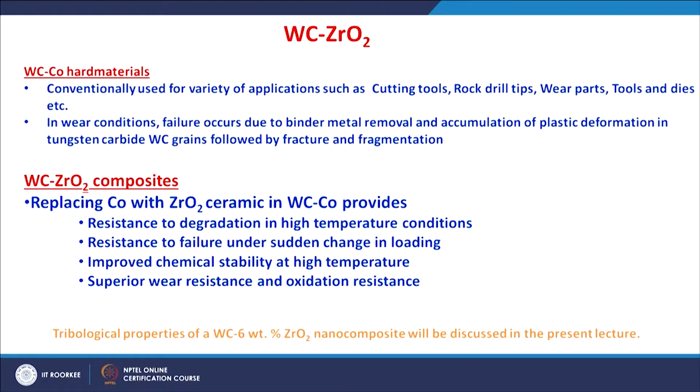First of all, the tungsten carbide of around 0.2 micrometer and the zirconia, which is a tetragonal zirconia stabilized by 3% yttria. So, 3 mole percent yttria stabilized zirconia powder of around 27 nanometers.

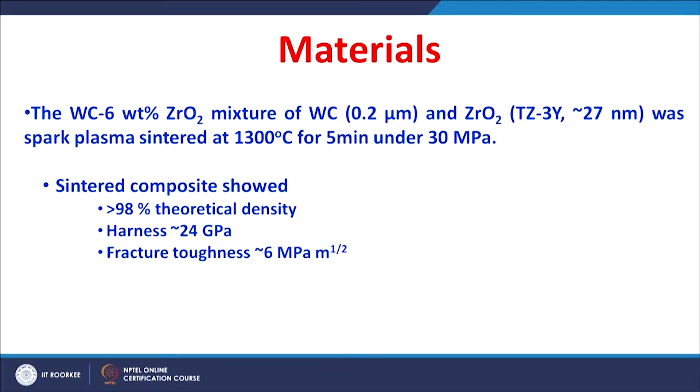These two powders, tungsten carbide and zirconia, were mixed into a tungsten carbide 6% zirconia powder mixture, and this mixture was spark plasma sintered at 1300 Celsius for 5 minutes under 30 MPa pressure with a high heating rate of around 600 Kelvin per minute.

All these ceramic composites showed a very high density of more than 98% of the theoretical density, and also showed a hardness of around 24 gigapascal and fracture toughness of around 6 MPa root meter.

The tungsten carbide cobalt material generally has a hardness of around 11 to 12 gigapascal, whereas such tungsten carbide zirconia has an extremely high hardness of around 24 gigapascal. Of course, the fracture toughness is moderate at 6 MPa root meter.

The sintered tungsten carbide zirconia ceramic composite was investigated for phase analysis and microstructural characterization. The phase analysis by X-ray diffraction technique indicates the predominant phases of tungsten carbide and tetragonal zirconia, with no other phase formed and no change from tetragonal to monoclinic zirconia during sintering.

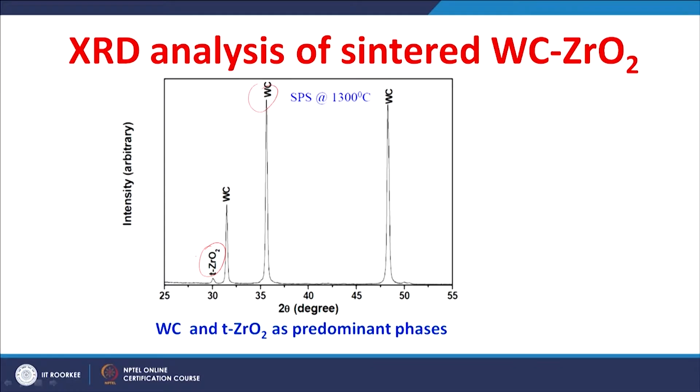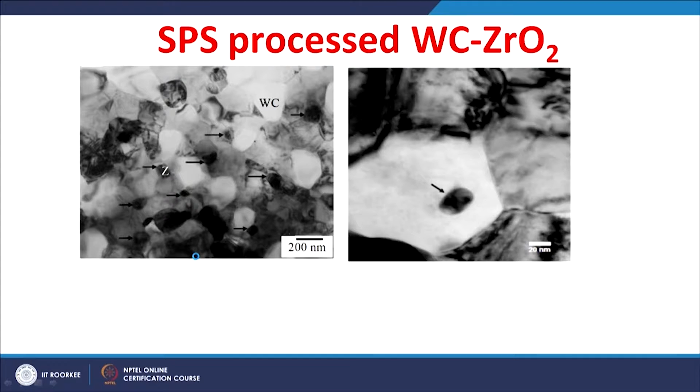This shows the efficiency of the sintering technique we used, that is spark plasma sintering. The spark plasma sintered tungsten carbide zirconia ceramics showed a microstructure of equiaxed tungsten carbide grains, with zirconia particles along the grain boundary as well as inside the grain of the tungsten carbide.

The equiaxed tungsten carbide grains have an average grain size of around 0.3 to 0.5 micrometer, whereas the zirconia particles are still within the nano region, having around 30 nanometers.

Considering the initial particle size of around 0.2 micrometer for the tungsten carbide and around 27 nanometers for the zirconia, this sintering technique is efficient to produce a dense tungsten carbide zirconia ceramic with nano-sized zirconia particles distributed within the grain structure of the tungsten carbide.

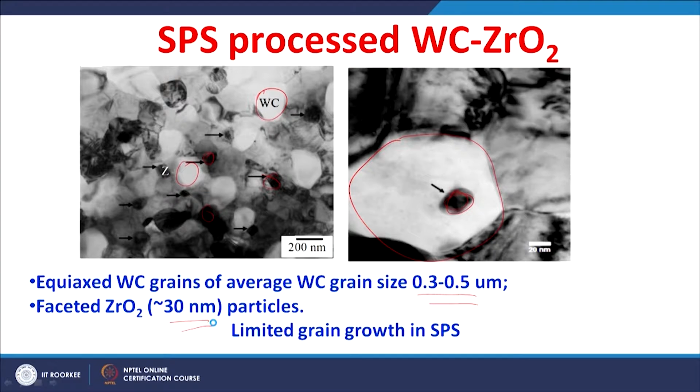There is limited grain growth occurring in spark plasma sintering, which gives a combination of superior properties. That is how we got a very high hardness of around 24 gigapascal and a moderate fracture toughness of around 6 MPa root meter.

These materials, the tungsten carbide 6% zirconia ceramics, were fretted against steel at different loading conditions with a fixed combination of fretting parameters.

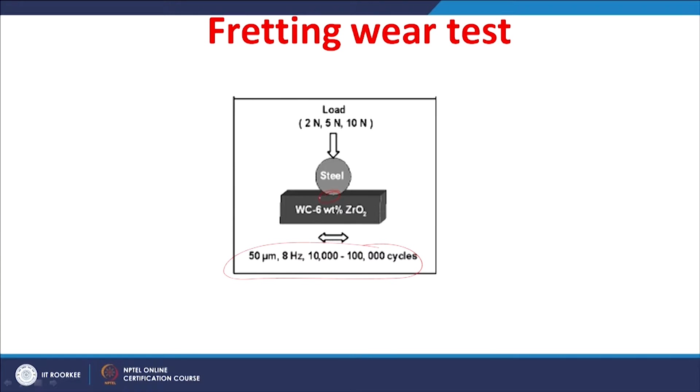This fretting was done in mode 1 fretting conditions, which gave gross slip conditions at the contact. The fretting test parameters were fixed at 50 micrometer oscillation displacement with a frequency of 8 hertz, and the fretting was conducted with varied numbers of cycles from 10,000, to 50,000, to 100,000 cycles.

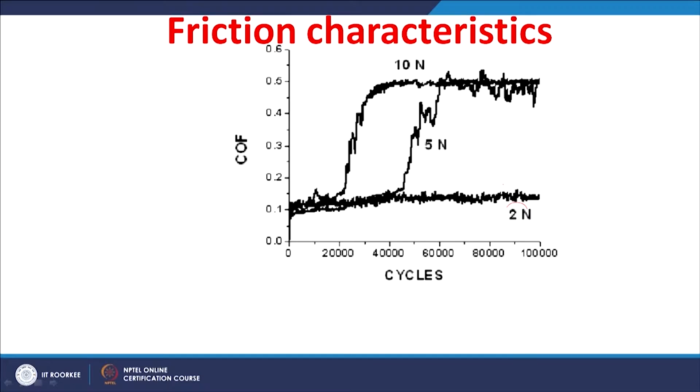Let us understand the frictional characteristics as a function of fretting duration as well as the load applied. This fretting shows that friction is strongly dependent on both the load and the number of cycles.

At a lower load, the friction drops to a very low coefficient of friction of around 0.1 within about 20,000 cycles, and then remains almost the same throughout the test up to 100,000 cycles.

There is no change in the coefficient of friction. Whereas, as the load is increased to 5 Newton, the friction coefficient is around 0.1 to 0.15 in the initial 20,000 cycles, and as it reaches 40,000 cycles it shoots up, and by around 60,000 cycles it goes to the maximum coefficient of friction of around 0.5.

So there is a transition with the fretting duration for the test done at 5 Newton load. And if you see the test done at 10 Newton load, the transition occurs even at an early stage. The coefficient of friction was less in the initial stages of around 20,000 cycles, and immediately after 20,000 it went up to

0.5 average coefficient of friction in the steady state, and this reaches around 40,000 cycles. So there is always a running-in state and a steady state, with no much difference between the running-in state coefficient of friction and steady state coefficient of friction at lower load, whereas there is a difference between the running-in state coefficient of friction and the steady state coefficient of friction at higher loads.

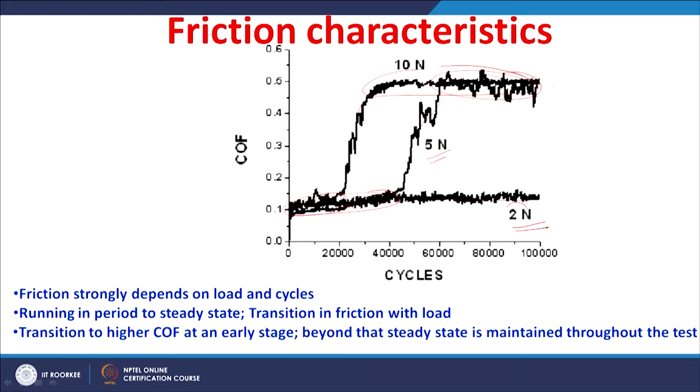In addition to that, we saw a transition occurring from low load to higher load in the friction. The transition to higher coefficient of friction occurs at an early stage for the test done at a higher load, and once it achieves the steady state, it actually remains in the steady state throughout the test.

The wear rate was also determined. You can see the wear rate varying from around 0.2 times 10 power minus 8 mm³ per Newton meter to around 1.2 mm³ per Newton meter. So there is a change in the wear rate with change in the load as well as the number of fretting cycles. First of all, the wear rate is of the order of 10 power minus 8 mm³ per Newton meter.

This is a very low wear rate compared to the wear rate obtained with the conventionally sintered tungsten carbide 6% zirconia ceramic, which shows 10 power minus 6 mm³ per Newton meter, whereas the spark plasma sintered tungsten carbide zirconia nanoceramic composite exhibited a wear rate of 10 power minus 8 mm³ per Newton meter.

Increase in wear rate is also observed with increase in the load as well as the cycle count. At a lower load, the wear rate was less for the test done for a small number of cycles, that is 10,000 cycles. For the test done at 10,000 cycles, even if you change the load, there is no much difference; it changes from around 0.2 to around 0.4 times 10 power minus 8 mm³ per Newton meter.

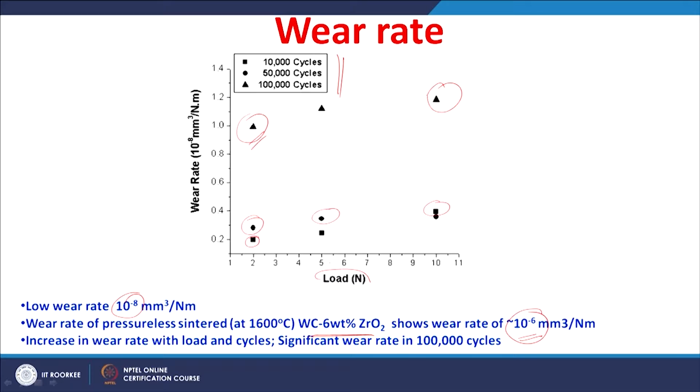Similar to that we observed for the friction, wear also changes with the load or the fretting duration.

The wear depth also indicates very important information. There is a negligible wear depth at lower loads of 2 Newton, but a significant increase in the wear depth as well as the wear rate at the higher loads of 10 Newton.

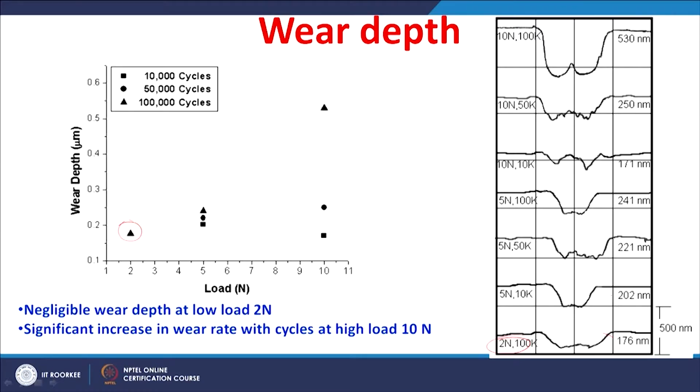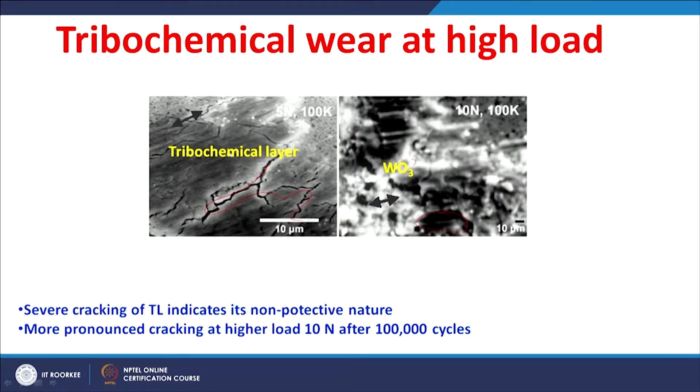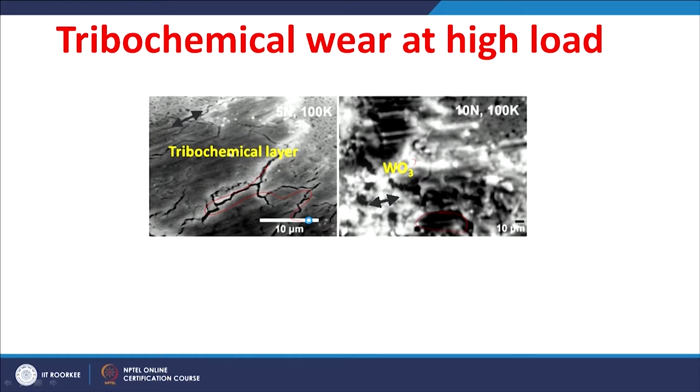Now these surfaces also indicate the tribolayer is severely cracked. The severe cracking of this tribolayer indicates it is non-protective in nature. So when the tribolayer is non-protective, it actually cracks, and then the underneath surface is again subjected to further wear. So at a higher load of 10 Newton, the more pronounced cracking is observed after 100,000 cycles. So tribochemical wear is dominant at higher loads, that is 5 Newton or more. At lower loads it is mild abrasion, and at higher loads of 5 Newton or more it is tribochemical layer formation and then removal, which we call tribochemical wear. So there is a change from abrasion to tribochemical wear with change in load in these studies.

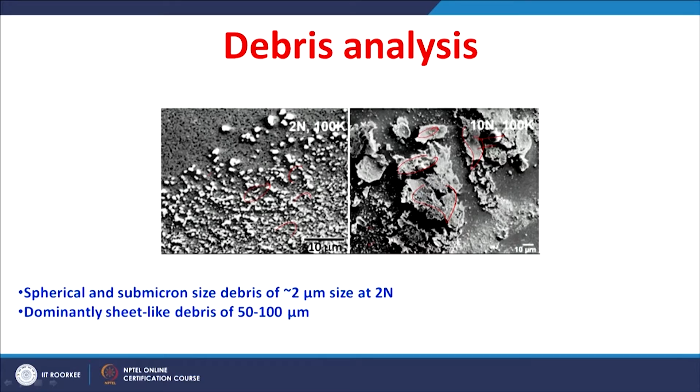The debris are also collected, and the debris analysis shows there is a striking difference with respect to load. At the lower load you can see debris of very small size, whereas at increased load of 10 Newton you can see dominantly sheet like or plate like debris with a larger size. Of course there is smaller debris too, but predominantly there is sheet like debris, around 50 to 100 micrometers, whereas the small size debris observed after fretting at lower load of 2 Newton is around 2 micrometers. So there is a change in the size as well as the shape of the debris with respect to load.

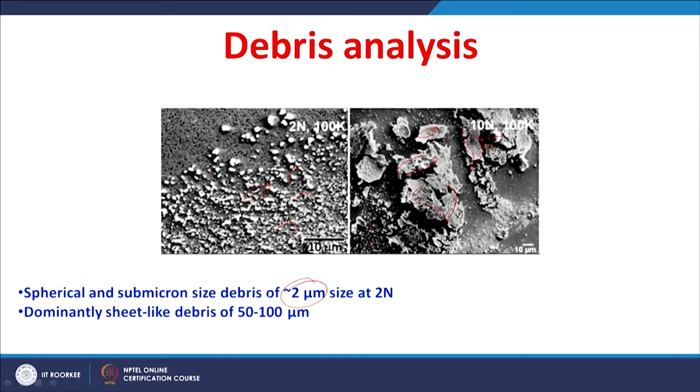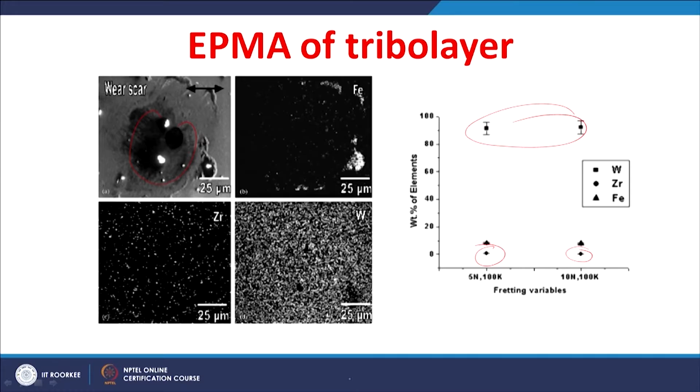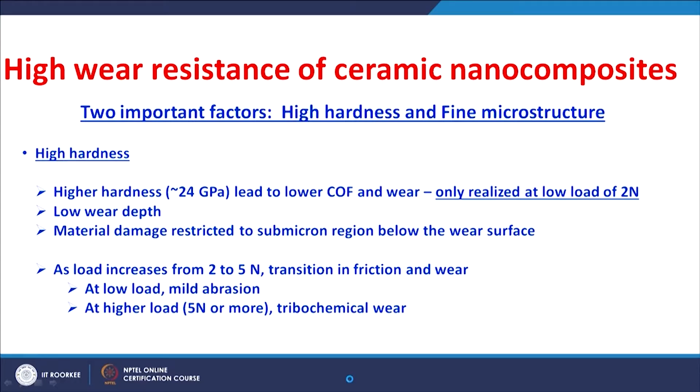So let us understand the wear resistance of the ceramic nanocomposites. Two important factors have to be considered: number 1, the high hardness, and number 2, fine microstructure. The higher hardness, which is extremely high, around 24 gigapascal for this nano ceramic composite, leads to lower friction and wear, but this is observed only at lower load of 2 Newton. At lower load there is very less wear, characterized by low wear depth, less than 1 micrometer. The material damage is restricted to the submicron region below the surface, whereas at higher load, as the load is increased from 2 to 5 Newton, there is a transition in friction and wear. At lower load there was mild abrasion, whereas at higher load, that is 5 Newton or more, tribochemical wear dominates.

With respect to the finer microstructure obtained by spark plasma sintering for these nanoceramic composites, at lower load of 2 Newton you found fine debris. The fine debris particles necessarily indicate the pull out of tungsten carbide particles. Once these tungsten carbide particles are pulled out, they are subjected to fracture, caused by the repeated fretting strokes. Once these pulled out tungsten carbide particles are in the contact where fretting continues in ambient conditions, there is a possibility for oxidation. So the pulled out tungsten carbide particles are oxidized to tungsten oxide. We can infer there is mild oxidative wear occurring at the contact at lower load conditions of 2 Newton, whereas at higher load of 5 Newton or more, these oxidized debris form a tribochemical layer.

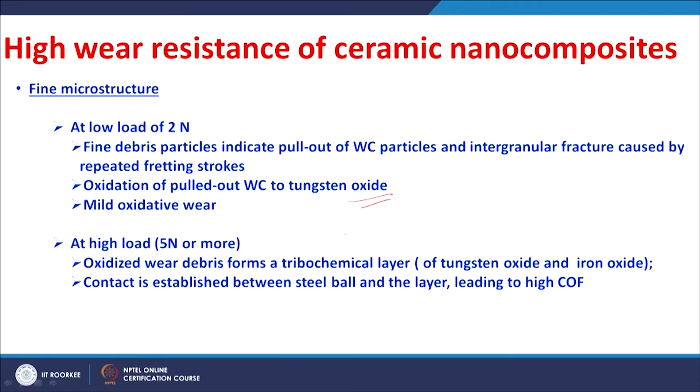The tribochemical layer is rich with tungsten oxide and iron oxide. Once this tribochemical layer is stabilized, the contact is actually between the steel ball and the layer, not between the steel ball and the tungsten carbide zirconia surface. The friction is happening between the steel ball and the layer, and because of that you get a higher coefficient of friction.

So we can also understand the transition in the wear mechanism by studying the debris size. In a lateral fracture model, the minimum load required to produce the fracture because of the point contact is dependent on the fracture toughness and hardness values.

Roberts has explained that the minimum load required can be determined if you know the fracture toughness and the hardness for the Vickers indentation. In this formula, beta is a constant relating the hardness to diagonal; generally for the Vickers indentation it is 2.16, whereas the constants eta and theta are taken as 0.2.

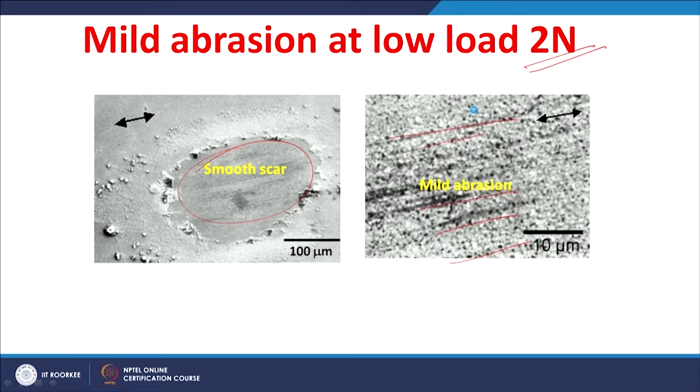We can get this minimum load required for the fracture to obtain, where there is predominantly abrasion, and the minimum load required for such an abrasion-induced fracture is around 2.15 Newton for the investigated ceramic composite. As we have seen, there is predominantly mild abrasion happening at a lower load of 2 Newton. So it is quite possible that at this lower load, such a fracture is initiated and then the removal of material occurs by abrasion.

Once this material is removed as debris, these debris are trapped in the contact and a few of them may go out of the contact, ejected out. That leads to a lesser coefficient of friction, and also because of these debris in the contact, it actually is a 3-body abrasion. In 3-body abrasion, these particles will be able to roll easily, giving lesser wear.

So all this at a lower load of 2 Newton - you get a minimum load of 2 Newton that is sufficient for fracture to occur. Once this fracture occurs, debris particles are in contact and a few are ejected out, leading to lower coefficient of friction, and because of easy rolling, it gives lesser wear as well. Whereas in case of a higher load, we saw there is tribochemical wear dominating.

The tribochemical wear actually resulted in sheet-like debris of a larger size, around 50 to 100 micrometer. We can also understand this with the adhesion theory. The size of the debris can be related to the work required for adhesion to happen - the work of adhesion, meaning the load as well as the tangential force.

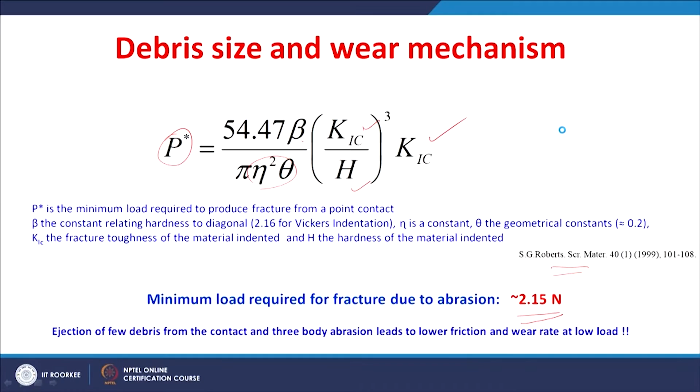Also, the higher coefficient of friction and wear can be understood by the non-protective tribolayer nature. We have seen the tribochemical layer formation and then their cracking, which indicates the non-protective nature. This non-protective tribolayer is fractured and gives the larger sized, sheet-like debris, and correspondingly higher wear at higher load. So these two mechanisms - abrasion occurring at lower load, and adhesion with corresponding tribochemical wear at higher load - can be understood right from the debris size.

So these two mechanisms can be understood from the debris size.

Concluding the results obtained in the wear behavior of the tungsten carbide zirconia nanoceramic composite in fretting conditions against steel: lower coefficient of friction around 0.1 is observed at a lower load of 2 Newton, whereas frictional behavior undergoes a clear transition leading to higher coefficient of friction around 0.5 at higher load of 5 Newton or more. Mild abrasion to severe wear with tribochemical layer formation and its delamination is observed with increase in load from 2 Newton to 10 Newton.

Under the selected fretting wear conditions, the tungsten carbide zirconia nanoceramic composite exhibits lower wear depth and higher wear resistance because of the hardness of the nanocomposite, which is around 24 gigapascal. The formation of mild abrasion scratches along with finer sized debris indicates better wear resistance of the composite at lower load of 2 Newton, whereas at higher load of 5 Newton or more, tribochemical wear is the dominant mechanism of material removal.

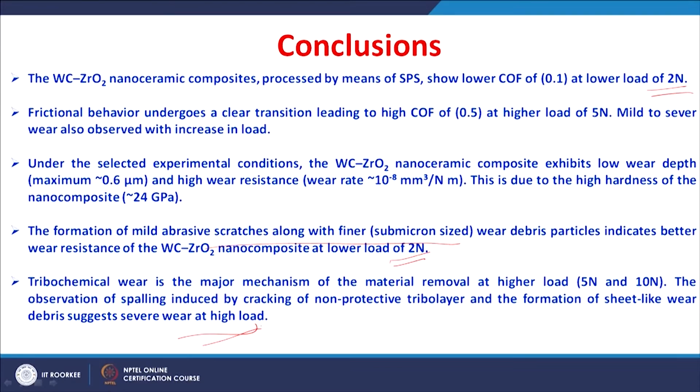This particular study indicates the wear behavior of this tungsten carbide zirconia nanoceramic composite depends on the load as well as the fretting duration. The mechanism of material removal changes from mild abrasion to tribochemical wear with change in the load from 2 Newton to 10 Newton.